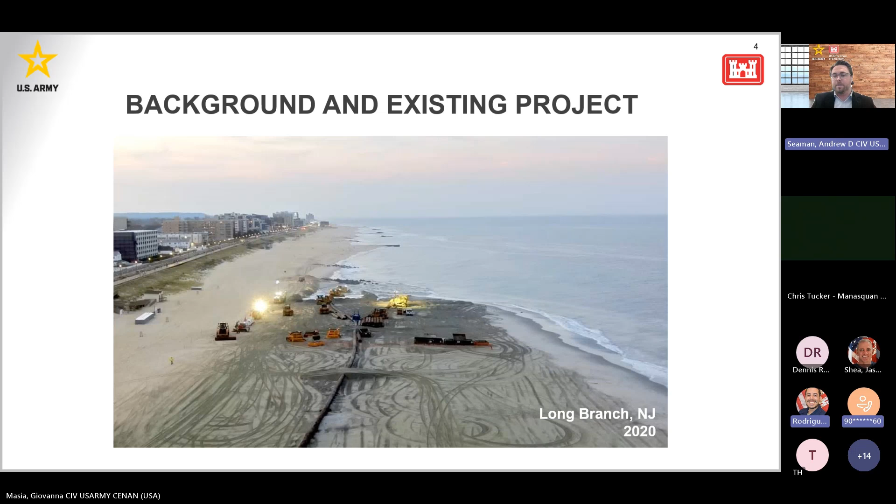To start today, I will cover a few details on the study's authorization and project history. A report recommending federal action for coastal storm risk management in Monmouth County and Ocean County, New Jersey, was submitted to Congress in 1956. The original construction project was authorized under the River and Harbor Act of July 3, 1958, as modified by the Water Resources Development Acts, or WRDA, of 1986, 1988, and 1992.

Following authorization, the construction of the existing project was initiated in 1994. Construction of Section 1 was completed in 1998, with the exception of Elberon, Deal, Allenhurst, and Loch Arbour, which was completed in 2016. Construction of Section 2 was completed in the year 2000. The existing project, consisting of a berm at plus 9.3 feet NAVD 88, is renourished periodically to help manage coastal storm risks to the community. Historically, the existing project has been performing well as designed and adequately managing coastal storm risk.

However, the resulting damages from Hurricane Sandy in 2012 have led the team to assess whether there are potential modifications to be made to the existing project to better manage the risk of inundation and to ensure the project can continue to be responsive to the needs of the communities it serves. This general reevaluation report serves this purpose and allows us to assess the potential improvements to the existing project.

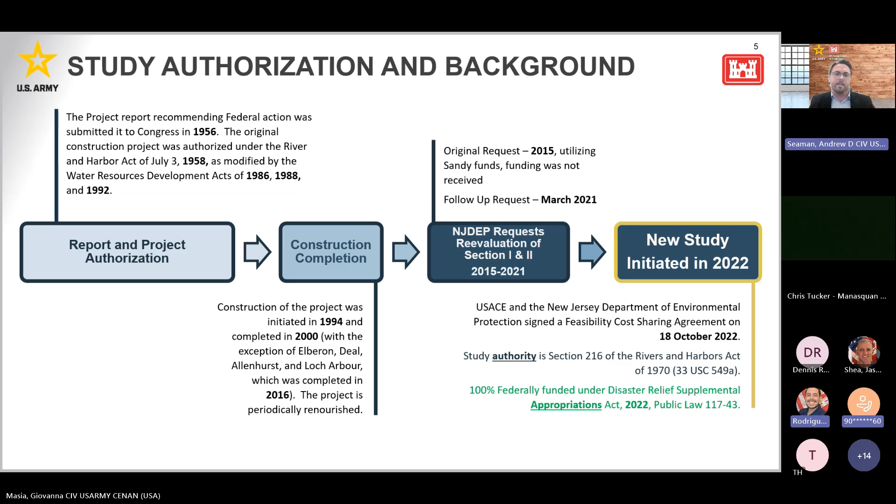Formally kicking off this effort was the signing of the Feasibility Cost Sharing Agreement, or FCSA, by the United States Army Corps of Engineers and New Jersey Department of Environmental Protection on October 18, 2022. This feasibility study is 100% federally funded under the Disaster Relief Supplemental Appropriations Act of 2022. Next slide, please.

Shown here is a snapshot of our study schedule to help visualize where we are at in our study process. I won't spend too much time recapping each milestone, but I think it is important to highlight the series of milestones throughout the feasibility schedule. The first two are the alternatives milestone, where we have the scope of our study and analyses finalized, and our tentatively selected plan milestone, where based on our evaluation of alternatives, we present the plan that we think is best. The tentatively selected plan is the plan that is detailed in the draft integrated report.

The third milestone on the schedule here is the command validation milestone. This occurs after we have received public and agency feedback and we determine how to proceed with the study. As shown, we are in the middle of our feasibility study process, and while we have conducted the evaluation and comparison of our alternatives, we are holding these public meetings to get your feedback.

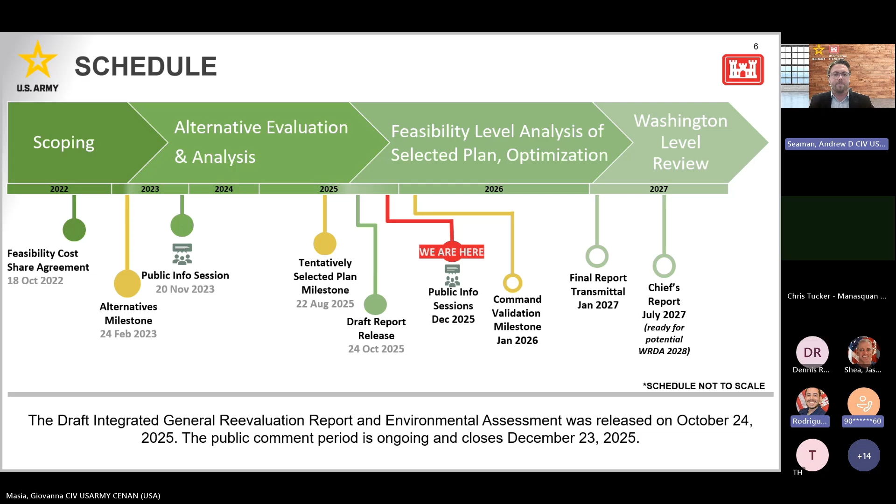We will take all of the comments and feedback into consideration for the command validation milestone, and once we have approval and concurrence on our path forward, we will optimize our plan and submit a final integrated report for state and agency feedback. Assuming we find an acceptable and justified project, this study will result in a chief's report, which is a recommendation to Congress on authorizing the proposed project. This final component of the study is expected in July of 2027. Next slide, please.

Now, what is the existing project? The existing project provides beach erosion control and coastal flood risk reduction for the highly populated communities and infrastructure along the 21 miles of Atlantic coastline in Monmouth County, New Jersey. The project area is divided into two sections. Section 1, which extends for 12 miles from Sea Bright to Loch Arbour, and Section 2, which includes the 9 miles from Asbury Park to Manasquan.

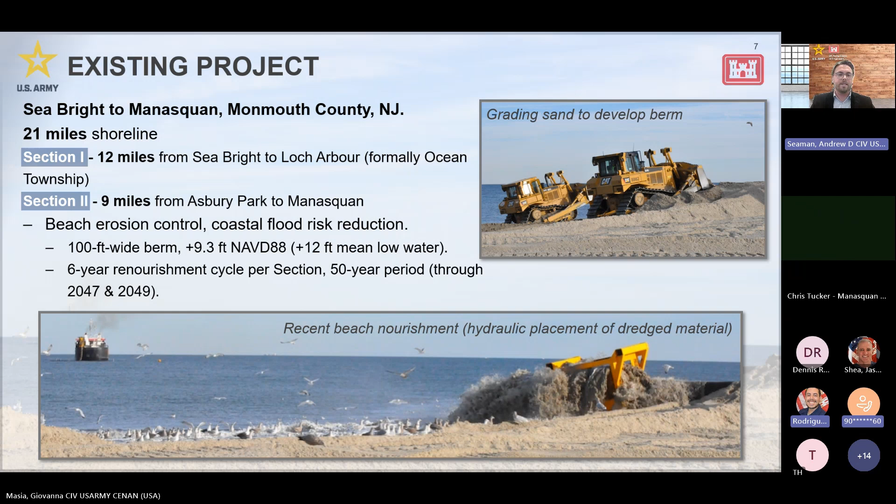The existing project maintains a 100-foot wide berm at plus 9.3 feet NAVD 88 and is authorized for a 6-year nourishment cycle over a 50-year period. The renourishment periods are currently authorized through 2047 in Section 1 and through 2049 in Section 2. Next slide, please. We'll now take a look at the scope and focus of this study.

During the early stages of this study, two main problems and opportunities for improvement were identified. To address inundation risk in Section 2, which leaves people and property at risk of damage, as well as the increased rates of erosion, commonly referred to as erosion hotspots in Elberon and Monmouth Beach within Section 1.

As the study advanced, measures specific to addressing the erosion problems in Section 1 were found to be better fit to be addressed within the existing authority. As a result, the focus of this GRR is on Section 2, and a separate engineering documentation report will be used to document and address the erosion problem in Section 1, specifically in Monmouth Beach. The team will continue monitoring the hotspot in Elberon to determine whether further action is required following recent renourishments.

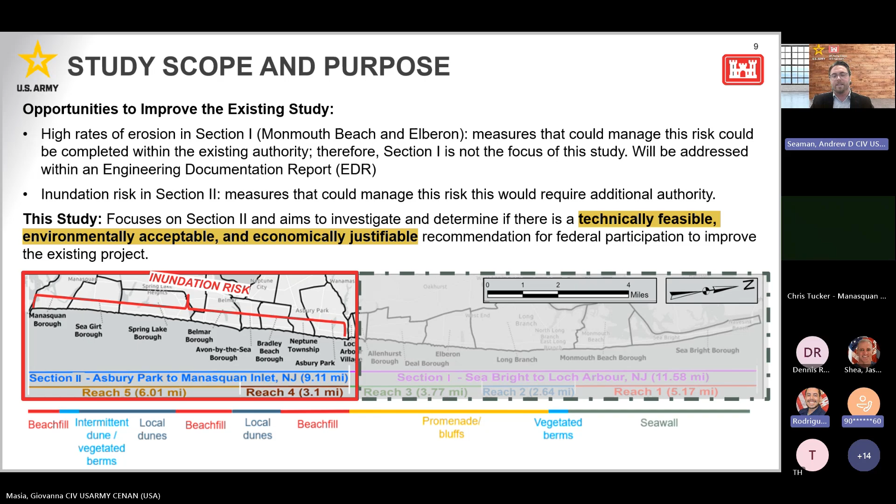For this general reevaluation effort, the study focuses on flood risk in Section 2 and aims to investigate and determine if there is a technically feasible, environmentally acceptable, and economically justifiable recommendation for federal participation to improve the existing project in Section 2.

Shifting now to our plan formulation process. The foundation of the Corps' planning process is the identification of a study's problems, opportunities, objectives, and constraints. These parameters provide the study a direction and focus not only at the start, but also over the course of the study to ensure the project remains on its intended track. Our list of identified problems include risk to human life, health, and safety from coastal storms, and storm damages due to erosion, inundation, and waves in Section 2.

As a result of the identified problems, a series of opportunities for the study include finding ways to better manage the system while considering regional interactions, and to update the existing project for the latest technology, engineering standards, and guidance. Further, we seek to recommend a solution that could potentially benefit the environment and improve recreation. Our objectives describe the results we aim to achieve by taking advantage of the previously identified opportunities. Our objectives are to manage the direct and indirect risks to human life, health, and safety caused by coastal storms, and second, to manage structure damage and other national economic development impacts caused by coastal storms, including flooding and erosion.

Our constraints are defined as things we need to avoid doing or cannot change while meeting the objectives. The study's primary constraint is that a potential solution cannot increase erosion rates, and we cannot reduce public access. While formulating, we considered impacts to public access, community resilience, environmental and cultural resources, as well as utilities. Next slide, please.

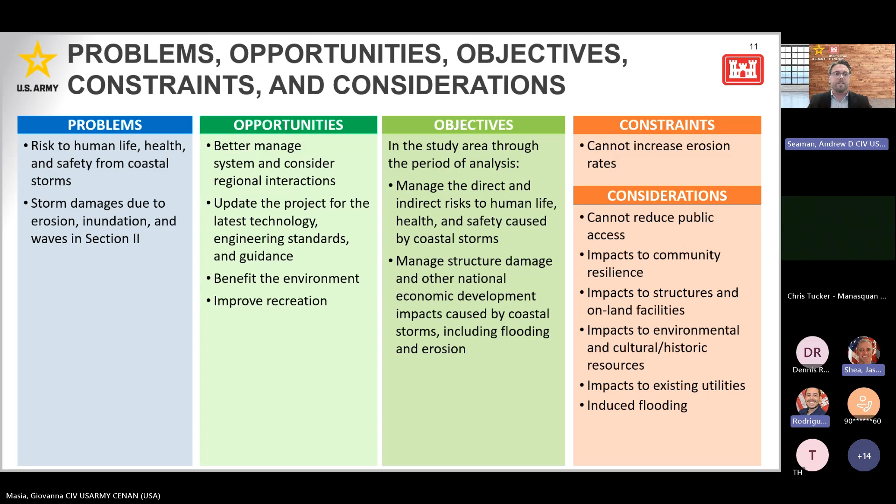Central to the Corps' plan formulation process is the comparison of alternatives to a baseline condition. The study aims to investigate incremental improvements to add to the currently authorized project. This study assumes the existing project will continue into the future through its authorized nourishment period. If this study does not find an acceptable alternative, the existing project would continue to be replenished periodically based on needs and funding availability.

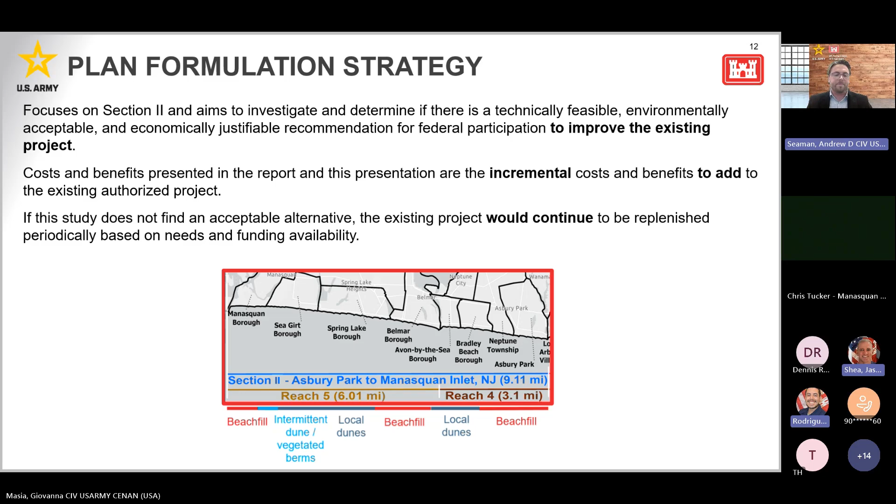To address coastal storm risk in the study area, the team coordinated with New Jersey DEP and started with a series of management measures which are the building blocks for our alternative development. Measures were compiled and screened based on their ability to meet study objectives and avoid constraints, their technical feasibility and environmental acceptability, and likelihood of economic justification. Once screened, the retained management measures were then used to formulate alternatives. And following alternative formulation, the alternatives are then evaluated based on their completeness, effectiveness, efficiency, and acceptability.

And finally, the plan formulation process considers all beneficial or adverse effects to the four accounts identified in the Principles and Guidelines of 1983. Those include the National Economic Development, or NED, Regional Economic Development, or RED, Environmental Quality, EQ, and other social effects, OSE, which includes life safety, recreation, and community resilience.

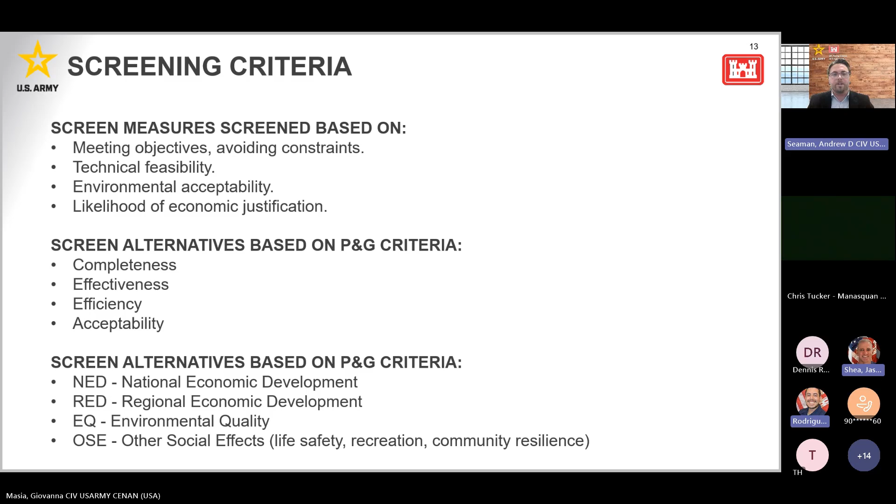Non-structural measures are those that can be applied to a specific structure and/or its contents that prevent or provide resistance to damage from flooding. Think of elevating a house to a specific elevation or raising outdoor utilities to be less at risk to coastal flooding damages. The team also looked at artificial reefs as a potential nature-based solution. The screening process took into account the measure's anticipated coastal storm risk management benefits and cost effectiveness. Of the measures considered, berm modifications, dunes, and non-structural measures were retained to initiate our alternative formulation process.

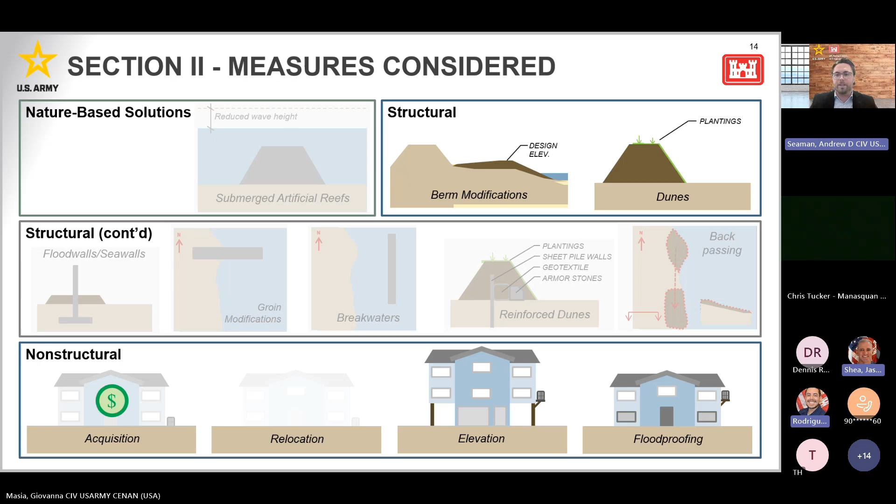We'll now take a look at our alternative formulation and selection. As is standard, a no-action plan is included to establish a baseline for alternatives comparison. In this case, the no-action plan is the existing project continuing as authorized through 2049 in Section 2. There were a total of 12 berm and dune combinations considered within the initial array, with dune crest elevation heights ranging between plus 14 feet and plus 20 feet NAVD 88, and berm widths ranging between 40 and 140 feet. A non-structural alternative was also included within the initial array, which consisted of elevating residential structures.

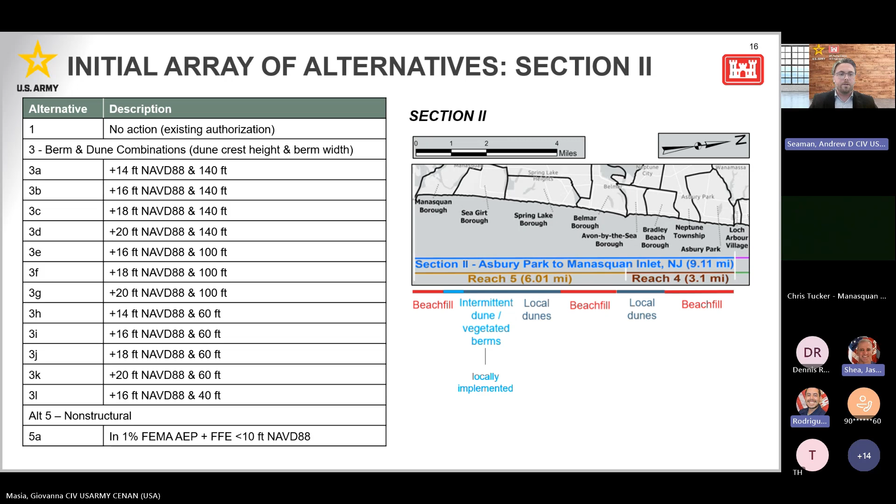Another screening process was performed to help narrow down the list of alternatives and to get us closer to selecting a plan. The alternatives highlighted are those that were advanced to the final array based on their ability to manage coastal storm risk while also considering overall costs.

Within the final array is Alternative 3E, a 16-foot crest elevation dune, 100-foot berm width. Alternative 3I, a 16-foot crest elevation dune, 60-foot berm width. And Alternative 3J, an 18-foot crest elevation dune with 60-foot berm width.

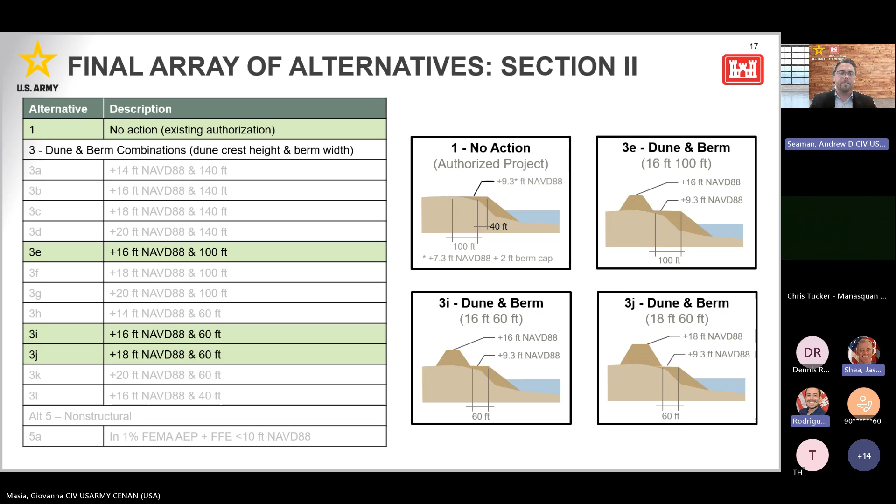Shown on this table are the costs and benefits associated with the final array of alternatives, given the intermediate sea level change condition. This table includes the final array of alternatives, estimated renourishment volumes, and incremental first costs relative to the existing project.

Incremental costs and benefits are presented as average annualized equivalent, or AAEQ, to demonstrate the anticipated annual costs and benefits above the existing project. And the resulting net benefits and benefit cost ratio, or BCRs, are shown at the bottom of this table. A BCR above 1 means that the benefits outweigh the cost and is what we here at USACE consider as economically justified.

Looking at NED benefits alone, alternative 3E is economically justified with an annualized net benefit of $150,000 and a resulting BCR of 1.06. While not economically justified are alternatives 3I with negative $990,000 in net benefits and a 0.3 BCR, and alternative 3J with net benefits of negative $122,000 and a BCR of 0.96.

While the team formulated to the intermediate sea level change scenario, we did consider the potential benefits of both the low and high sea level change conditions. The anticipated benefits were found to be lower given the low sea level change scenario and higher NED benefits given the high sea level change scenario.

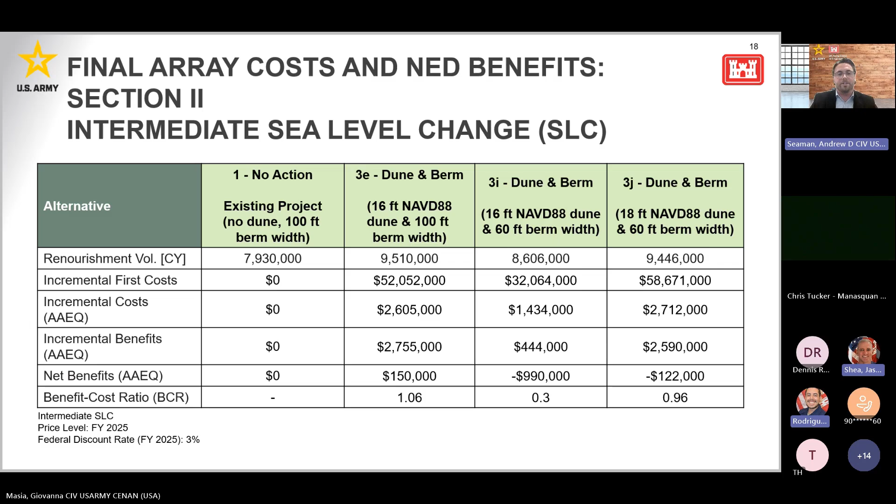The study team evaluated the contributions of each alternative in the final array to the national economy, regional economy, environmental quality, and other social effects. The alternatives were assessed based on their completeness, effectiveness, efficiency, and acceptability in providing incremental improvements to the existing project. Again, this is captured by comparing alternatives 3E, 3I, and 3J to alternative 1, the no action plan.

Therefore, while the existing authorized project is performing as designed and is effective at managing coastal storm risk in the area, it does not contribute to managing incremental risk. As shown previously, alternative 3E is the only alternative providing positive net benefits within the National Economic Development Account and is the only alternative that is economically justified.

Regional economic development effects are the impacts of project spending either directly or indirectly on the local economy. All alternatives contribute positively to the regional economy, for example, by providing jobs, with both alternatives 3E and 3J contributing similarly to the RED account.

Environmental quality, or EQ, are the non-monetary effects on significant natural and cultural resources. Alternative 3E keeps the berm width the same as the existing project, while alternatives 3I and 3J propose a reduced berm width of 60 feet. It was determined that all alternatives would have minor impacts to essential fish habitat. However, recovery of these resources is expected and the impact would be temporary.

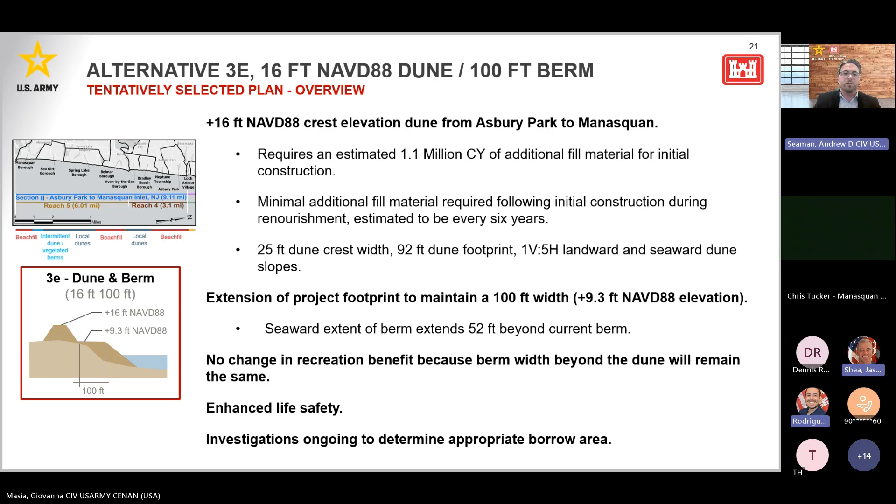The upcoming draft renderings depict the height above ground of the proposed dune at a given location. From Asbury Park to Manasquan, the beach conditions can vary quite a bit. In some areas, there are existing locally maintained dunes, where in neighboring towns, there are no dunes. Generally, due to the plus 9.3 feet NAVD 88 berm height, relative height above ground will range between 0 and 7 feet to the top of the proposed dune. So in places where the beach elevation is 10 feet, the top of the proposed dune would be approximately 6 feet higher than the current beach elevation.

Draft renderings are for visualization and communication purposes only. They are based on historic survey data and do not represent exact dune crest elevations and current berm conditions. The renderings also do not account for the exact width of the proposed dunes, and they were created solely to demonstrate the height. Since we are in the feasibility phase, these renderings visualize early stages of design and are artistic interpretations of the approximate height above ground. Further, these are subject to change based on plan optimization and public feedback.

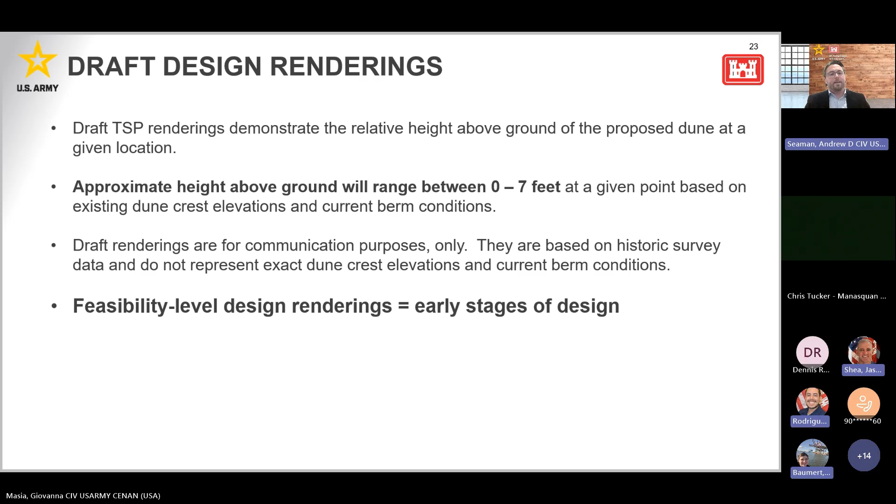The first example here is a view looking towards the beach from the boardwalk in Avon-by-the-Sea near Garfield Avenue. Based on the historic survey data, the ground elevation on the beach is approximately 10 feet NAVD 88. Accounting for the approximate height above ground, the top of the dune without plantings would be roughly 6 feet higher than the shown elevation on the beach. Again, this is an artistic interpretation of what the proposed dune may look like at this location in Avon.

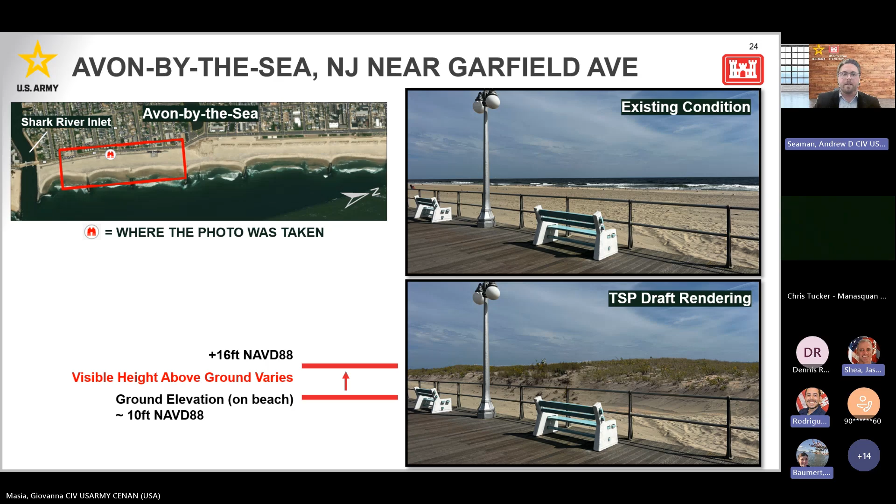Next up, we have a draft rendering of the proposed dune in Sea Girt near Brooklyn Boulevard. The existing condition in Sea Girt includes a series of intermittent, locally maintained dunes. These are considered intermittent due to the gaps between the dunes, which are used as beach access points. The proposed plan accounts for a continuous dune system with on-grade beach access, as shown in the above right photo. That example demonstrates a beach access point in Atlantic City, New Jersey, commonly used across beaches in southern New Jersey.

For portions of the project area with varying levels of dunes in place already, the proposed dune may not appear as drastic. We also want to note that in this specific instance, the intent of the rendering is not to show where beach access will or will not be, rather to demonstrate what a continuous dune will look like after a few seasons. Next slide, please.

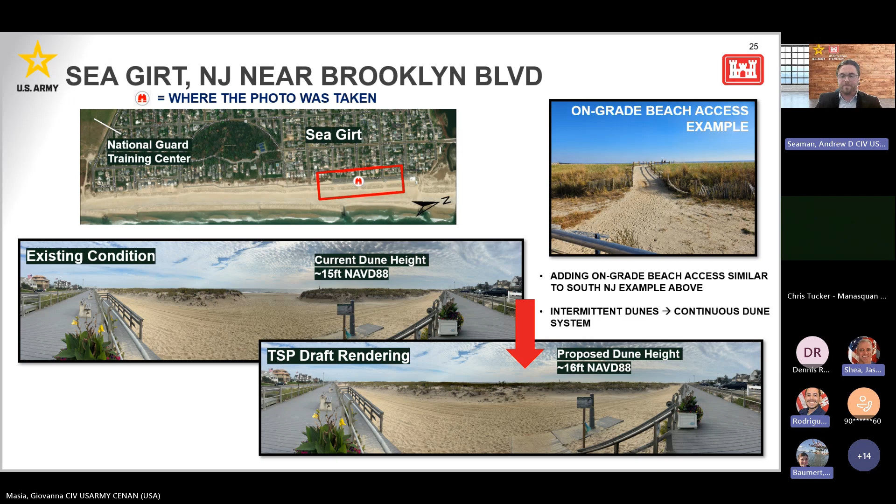Next up, we now take a look at a view along the asphalt boardwalk in Manasquan near Ocean Avenue. With an approximate ground elevation of 13 feet, to meet a proposed 16-foot crest elevation dune would require an additional 3 feet above ground. While the height of the snow fencing may vary at different parts of the beach, this rendering shows the top of the dune to be above the top of the height of this section of fencing.

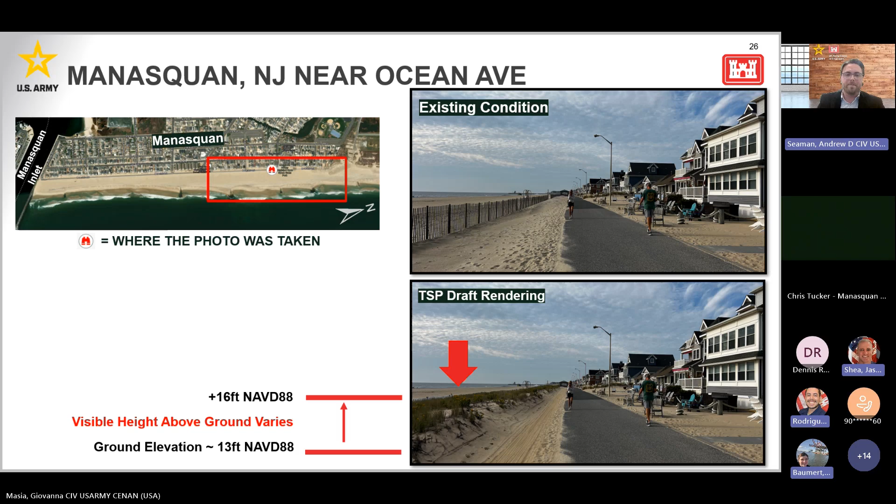The plantings shown again depict the plantings likely after a few seasons of growth and do not depict what the dune will look like following initial construction. And similar to the example shown for Sea Girt, keep in mind the on-grade beach access points in Manasquan and in locations throughout the project area. Next slide, please.

And finally, a view from the beach looking west in Manasquan near Riverside Drive. With a ground elevation of 11 feet from the position where the photo was taken, the top of the proposed dune would be approximately 5 feet higher than the existing beach elevation. These handful of examples show how the perceived height of the proposed dune will vary based on current conditions.

And keep in mind the height above ground range between 0 and 7 feet. The existing project maintains the beach's elevation between 9 and 10 feet. So in areas with no dune or areas with elevations closer to the existing authorized height, we can expect the height above ground to be closer to 6 feet or 7 feet. And for the beaches with intermittent dunes in place, the additional height may be minimal.

I'll now hand it off to our environmental team lead, Katie Amirr, to present details on the study's NEPA compliance, environmental considerations, and a brief overview of the cultural resources effects assessment. Katie, over to you.

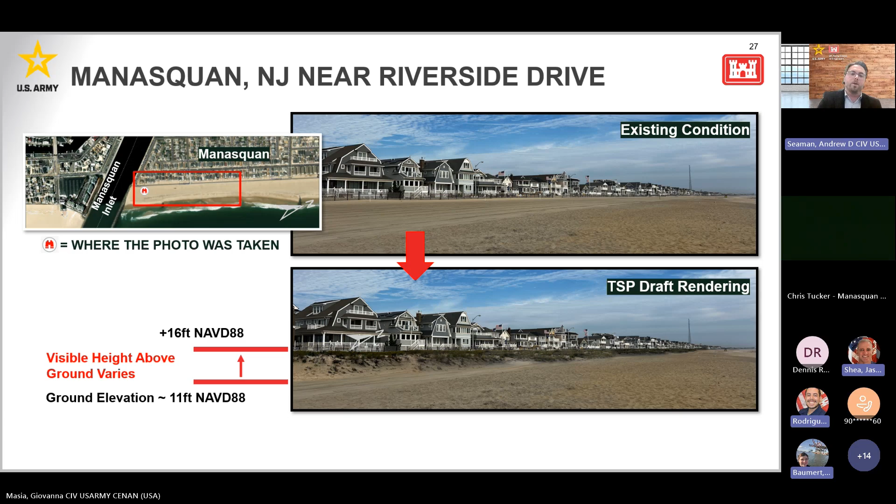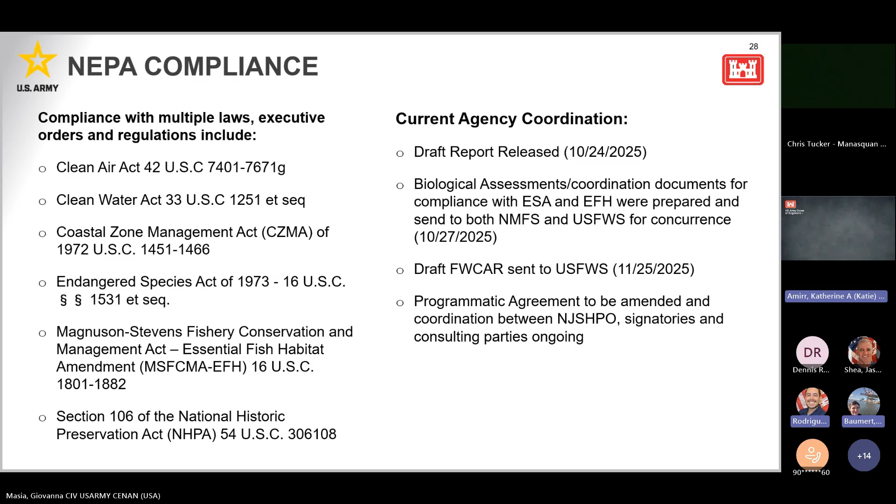These laws and regulations are addressed in the draft report and the appendices, which were released on October 24th of 2025. These appendices go into more detail about the biological assessments and the ongoing coordination with both National Marine Fisheries Service, U.S. Fish and Wildlife Service, as well as the programmatic agreement to be amended with the New Jersey SHPO. Next slide, please.

As part of the Endangered Species Act compliance, there are 8 species managed by the U.S. Fish and Wildlife Service, including the piping plover, red knot, and sea beach amaranth, which do have a high likelihood of being within the project area. And there are 7 species managed by the National Marine Fisheries Service, including 2 species of whales, 4 species of turtles, and the Atlantic sturgeon. Next slide, please.

The district has performed cultural resources effect assessment and has made the determination that the project has the potential to adversely affect several historic properties and 1 historic district based on the proximity to the dune system, including Ocean Grove Camp Meeting Association Historic District Boardwalk and Pier, the Asbury Park Convention Hall, Howard Johnson Pavilion, the Asbury Casino and Carousel.

The district is coordinating these effects with the New Jersey SHPO and other interested parties with the release of the draft report, proposing to amend the existing programmatic agreement for the project to establish a process for avoiding, minimizing, and mitigating effects. And back to Andrew.

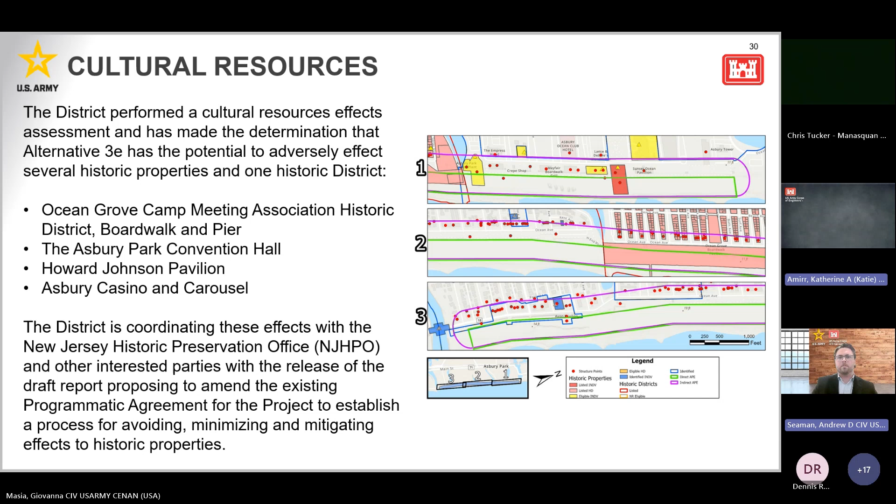Thanks, Katie. So what's next for the study and where do we go from here? The draft Integrated General Reevaluation Report is out for public and agency review through December 23rd, 2025. We will evaluate those comments and confirm with New Jersey DEP and the Chief of Engineers on the path forward and whether Alternative 3E remains the plan we want to pursue. The team will then refine and optimize the project based on feedback and the agreed upon path forward.

A final Integrated General Reevaluation Report will be submitted for state and agency as well as Washington level reviews. A Chief's report recommending authorization of the project will be sent to Congress. If authorized and appropriated for by both federal and non-federal entities and agreements are executed, detailed design of the project would then begin. A few tentative dates are shown subject to timely authorization, appropriations, and agreements. It accounts for the pre-construction, engineering, and design phase through 2028, and construction to begin around 2031.

So in closing, here's a brief recap. Again, the tentatively selected plan specifies a plus 16-foot crest elevation dune and 100-foot berm width, inclusive of Asbury Park and south through Manasquan, New Jersey. The tentatively selected plan is draft, and details are subject to change based both on new information and your feedback. Since this project has not yet been approved or funded by the United States Congress, the state of New Jersey, or local governments, there is no impending construction or permitting for the proposed improvements.